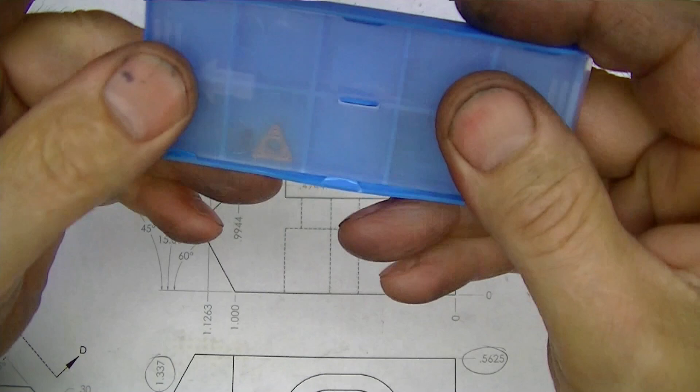Here's a job where I'm making some insert cartridges for a customer. These bolt into some other main part of the cutter body, and I'm doing three of each. This is one that's considered straight, and then there's this one that is a 45-degree angle, and they're using a screw-in style insert, so I'm using the sample insert and screw here. This is a 1/4 inch IC, inscribed circle, insert, and I'm making these out of A2.

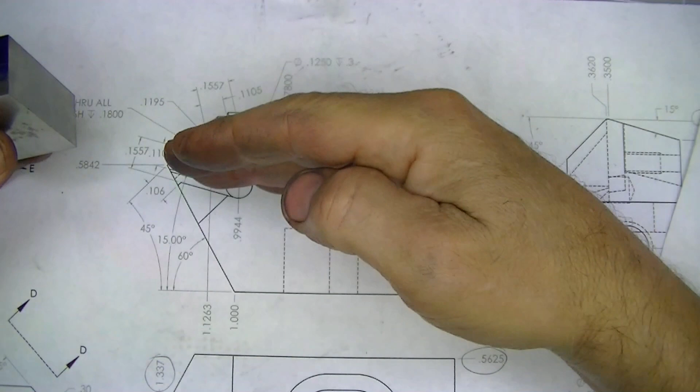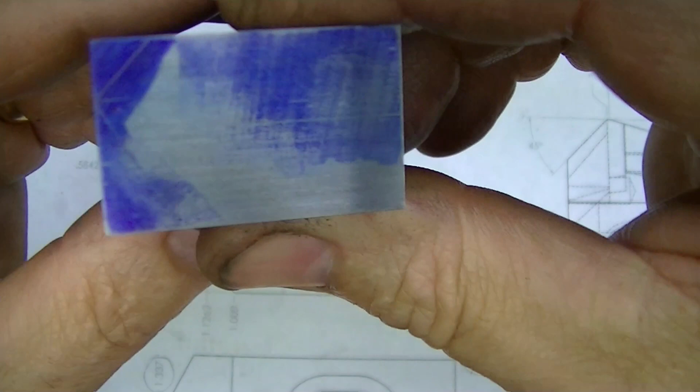And the procedure I'm using here is, since I'm doing three, I'm taking the major axis that has the most features on it, and making a block long enough in this direction to accommodate all the blocks plus saw cut plus allowance. So I'm doing the cross section of this on the end of this block. Same way on the other one. This is the block that matches this one. You can see I've got my scribe lines on here for where I'm going to saw this, and to match this cutout, and then the details on the end here, the actual angles.

One important note is that when you're doing this type of thing, you need to think through ahead sequence-wise. I could go over to the saw and say, okay, I'm going to saw this out, and then we'll saw these off. But now when I go to do my grind, I might want to be sitting this way to grind on this face. In this case, it wouldn't really matter, but it's always good to think ahead, and you might say, you know what, I need to leave this till the last operation because I need to sit on it or reference an edge on it.

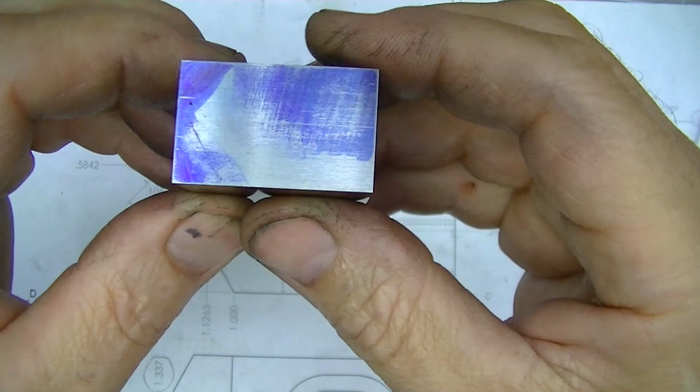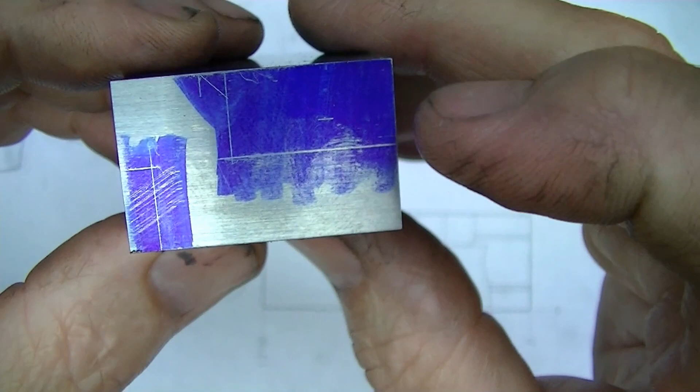So this is the block for that one. This is the block for this one, and you can see we've got our blue Sharpie on here. These are just lines for me to saw this out first, then I'll surface grind it. I'm going to saw both of these out, and I'll mill them, and then I'll come over on the surface grinder and clean the shape up both directions, and I'll even come in here and put this little 45-degree edge on there.

Anything that's on the cross section that you can put on full length, it means I'm not going to have to pick up individual parts and put them in and put a detail on one piece at a time. So that's what we're doing, and we'll go to the saw.

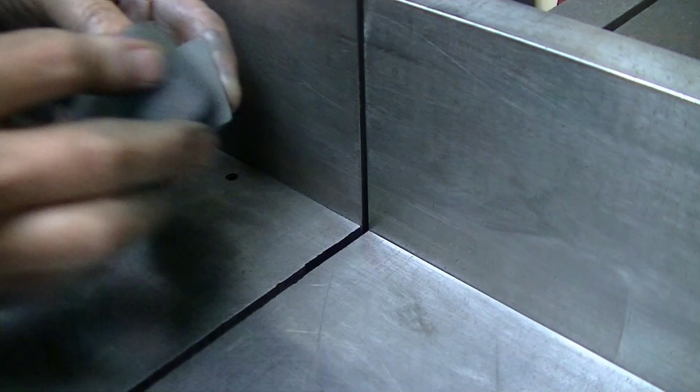I'm stoning the Rollin saw surfaces to get rid of any burrs or embedded chips or anything that's not a smooth surface here, because we're working with already surface ground parts. So we have to be careful that we don't, as we clamp these in the saw, if there's any burrs or anything, we'll end up putting a dent in the part from those chips. So very important to stone off the saw before you start.

Sawing out the extra material here on the Rollin saw, very handy to be able to clamp the part, have a straight line cut. You don't have to push in the parts. I'm not concerned about them moving or skidding. And controlled feed rate. I have a real nice, very aggressive Starrett blade on here.

Sawing the other corner out with the bandsaw. Just going by the layout lines. Coming across from the end. Getting rid of the major material. There's everything removed off the one piece.

There's the other one that needs the angled cuts on the end, 30 degree I'm showing there. And in this saw we can put this sideways and clamp end to end, so we don't have to try to do angled cuts having to come into the edge of the part. So pretty handy.

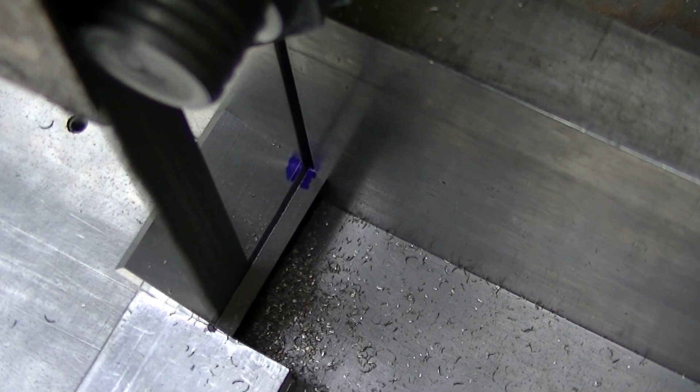Now I'll turn around and get on the other side using a 45 degree that we have to cut there. The other side, you're on the bottom. There's my line that you're seeing that we're going to use to visually align with. Got my 45 gauge on the left hand side there that I'm holding the angle.

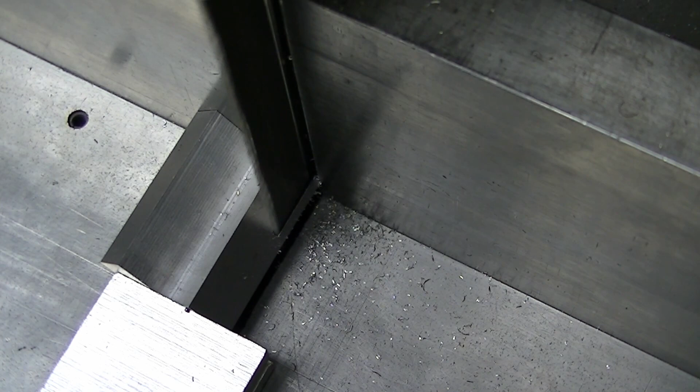And then I'm clamping with my chin on the cam lock on the saw to get that angle. And then sawing off the 45. Again, here you can see how sawing angles is real easy with the clamping arrangement there. So still quite a bit of material in there, but we're going to blast that off with a grinder.

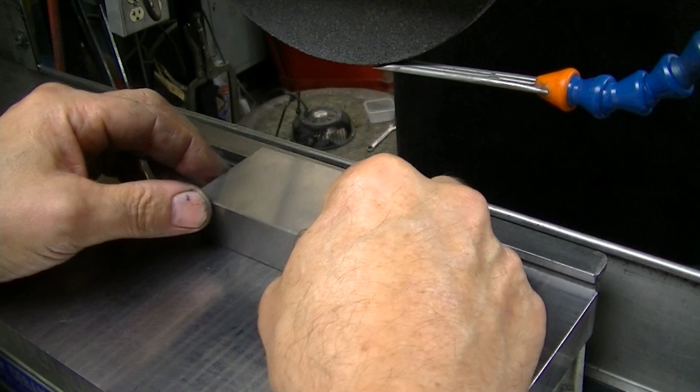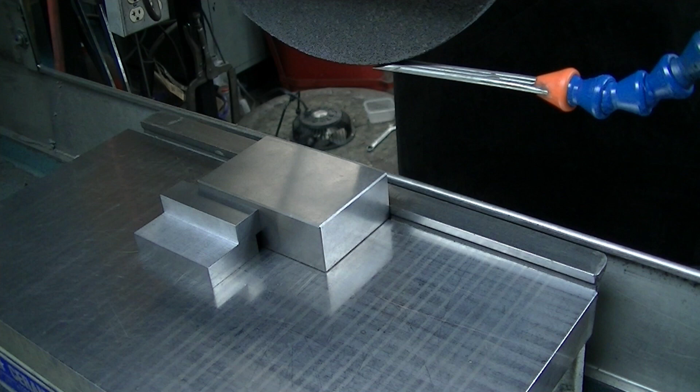The hydrodynamic action works on well-stoned blocks and chuck also, not just the surface plate. So here I'm getting ready to stage the two pieces that have the same step height and depth from the front edge. And you see I placed the one in there on its nose. And the other one goes in, same location, making sure everything's clean, always wiping everything off chuck and part.

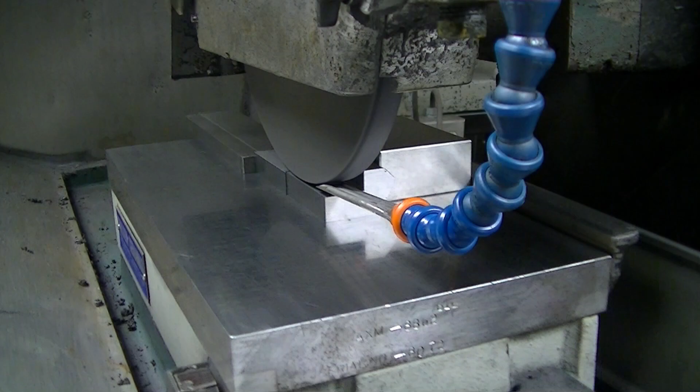Be adding blocking to the back here so that these parts can't skid endwise, and forcing the pieces in with my fingers snug while I tighten the chuck down. Here we're coming in with the wheel, just getting ready to touch off, and just touch off on the part to get our initial starting position.

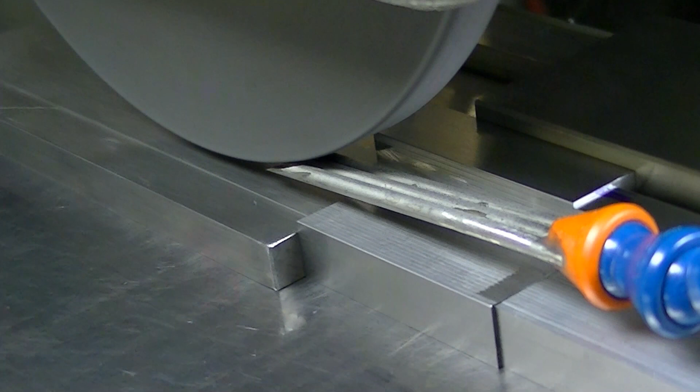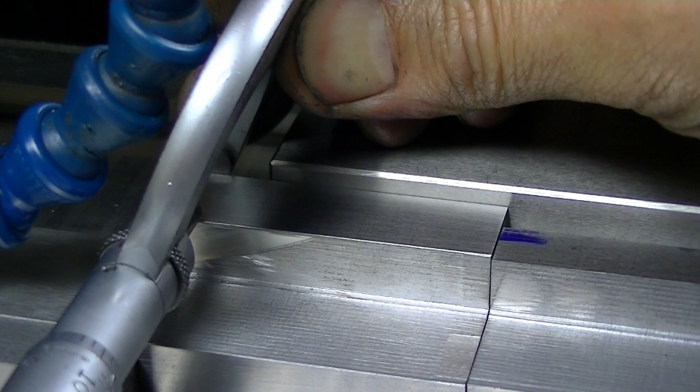And then here we will just touch off on the edge of the wheel, on the back side of the wheel there I'm touching off to establish where I am, and just taking a plunge cut there, creep feed, where I go in and take a cut. Take another little deeper cut, and then we're going to move out and check with the micrometer, see where we are, and set our dials accordingly.

Now I've moved over the full amount, which is almost 30 thousandths, and taking that full cut very slowly with the full face of the wheel. And I don't have the coolant in the ideal position here in this particular cut. Later on you'll see one where I move the coolant up in a better position. But here's where we're just removing our material, fast forwarded there toward where we're coming out the end.

You will see a little burn at the top because of poor coolant placement, but these parts at the moment are soft, so it doesn't cause any real issue. But this is a quick way to remove a lot off facially instead of just pecking away at it with the side of the wheel. You're using the face, the actual outside diameter of the wheel to do the cutting, where it's a better conformity ratio of grind. And here we're just taking a spring cut.

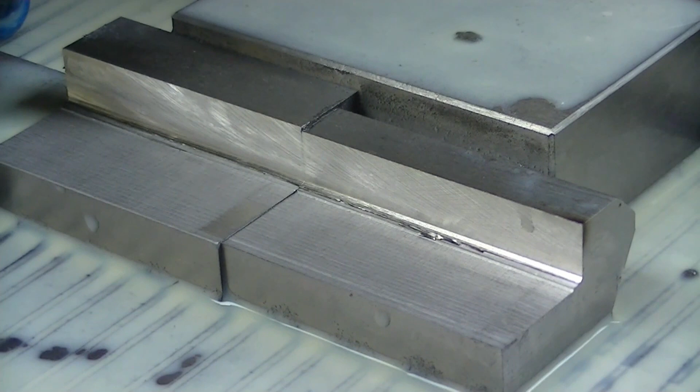We went in until we actually caught the surface again, and it's sparking out. There's the finished surface, and we'll check again with the mic, make sure we're where we need to be.

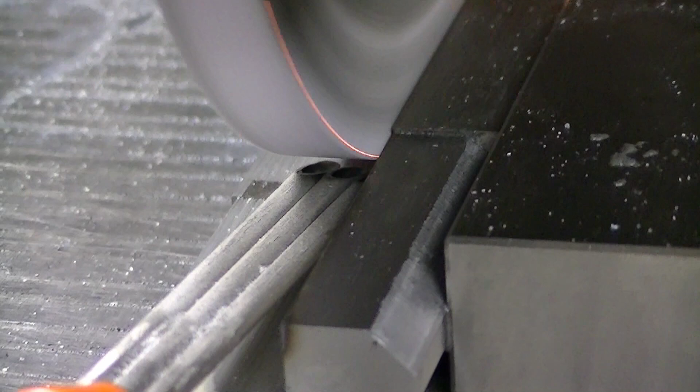Here I'm using a razor blade just to cut into the corner of the wheel and see what kind of radius I've got on the wheel, and I dressed it back until I was happy with the radius that I had left on the wheel. Now I pick up with that freshly dressed corner to get back touching that finished face, getting ready to actually start to plunge down in depth now to take this thing to the vertical thickness.

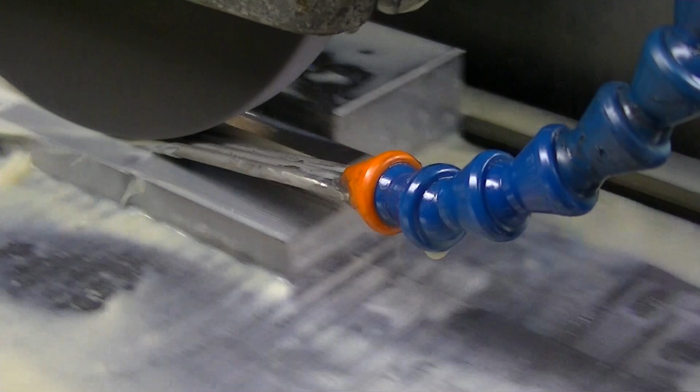We're going to be just reciprocating, down feeding a few tenths per pass, reciprocating quickly, and plunging down till we get a clean up where we can do a measurement. So we've gone down till we've cleaned up completely, and you can see there where I've got basically full wheel contact cleaned up there. Now we're just going to move over full wheel width. We've raised the wheel up, and now we're going to come back down to the same setting as we did on the back pass, basically just to remove the material quickly.

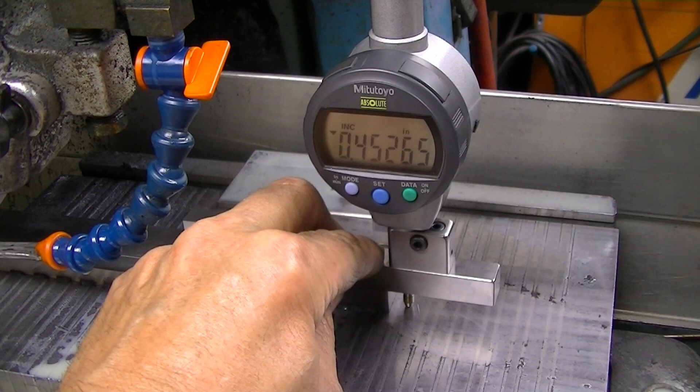So that's how you can not have a lot of wheel breakdown, by just straight plunging a few tenths at a time. Here we're going to check where we are, see what our measurement is, and then we are going to correspondingly go back and replunge those surfaces, taking off the amount we need to get down to thickness. So it all happens really quick, faster than going over to the milling machine and trying to mill and then come back and forth between the two parts.

So plunging again, moved over, plunged again. Obviously it took a little longer than this. This is sped up and cut down in time, but now we've got our full width. Now we'll measure again, cleaning off where the depth gauge is going to hit. We're shooting for 4375. We're within a tenth, which is plenty close enough for what we're doing here.

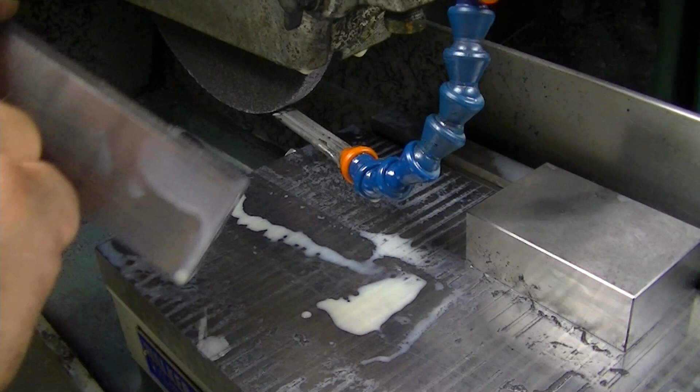Here I'm using a piece of carbon rod to pry the parts up, break the stiction loose. There's the grind finish and the face grind. You never want to slide parts on the chuck if you have a choice. So I'm using that stick, pretty handy, to just pop parts up and get the vacuum, the suction there to break loose on the pieces. And then same way with the 1, 2, 3 block, put a clamp on there, get the pry bar under the edge of the clamp, pop it loose, get that broke loose. Just a good way to get things off the chuck.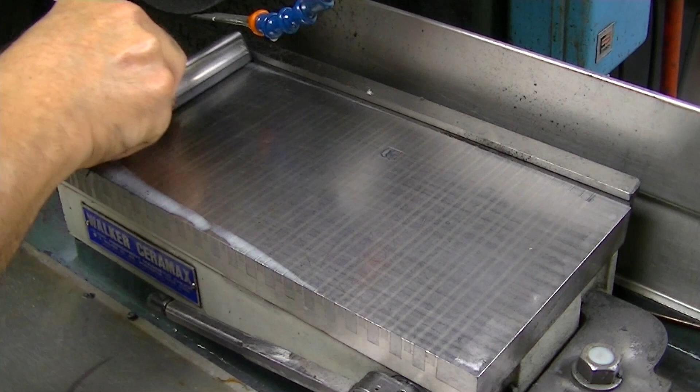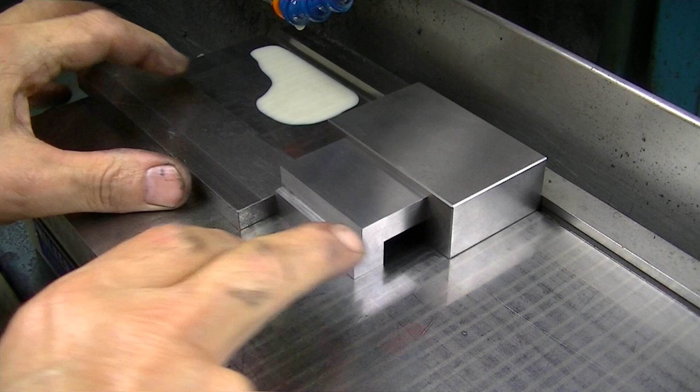A squeegee is also something that you might not think of, but works really well on cleaning the chuck off. Depending on your coolant, you might want to put a piece of Viton sheet stock in there for the squeegee, because it'll break down otherwise. Doing the other step on this side of the part, the opposite side, everything's been stoned and cleaned. We're pushing up, we're using our back block so the part can't skid down the chuck. Holding everything in place, putting a little finger pressure on there as I tighten the vise.

And same procedure here. We come in, touch off, see where we are, take a creep feed cut through this edge to establish it. Now you see I have the coolant in a much better location up at the top of the cut, so the coolant's carried down through. That last coolant placement was not good. It worked, but you'll see here, this is much better. There won't be any burn at all on the edge of this part when we come back.

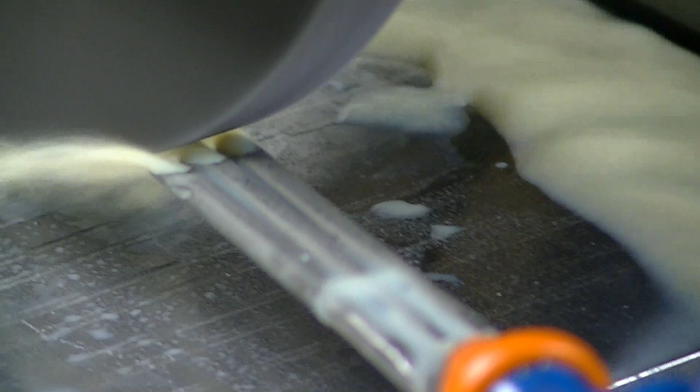The wheel will wear some as it goes through. It's always important to make sure that you've got an actual cut full length. Here I'm using the end of the calipers to measure the step height here. Obviously I checked and deburred the edge there on this outside, and then make our adjustment, creep feed through again, the full amount that it needs to be removed. Cable drive is fairly important on this.

If you've got a really sloppy gear drive on your grinder, you might have issues with creep feeding through like this, because it is basically climb cutting.

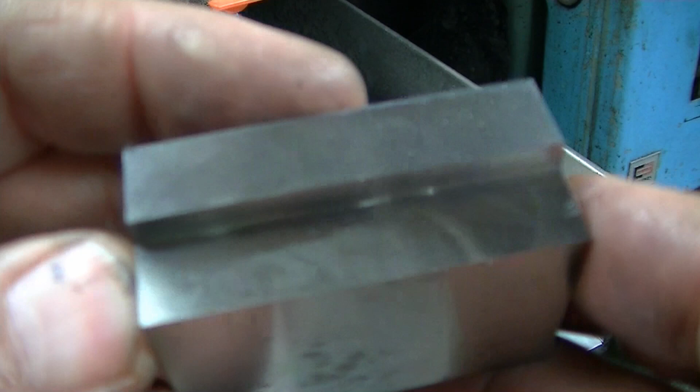Checking my height there, again using pieces to pop your parts off, break the suction. You don't want scratches on your part or your chuck from dragging the part off over grinding grit on the chuck.

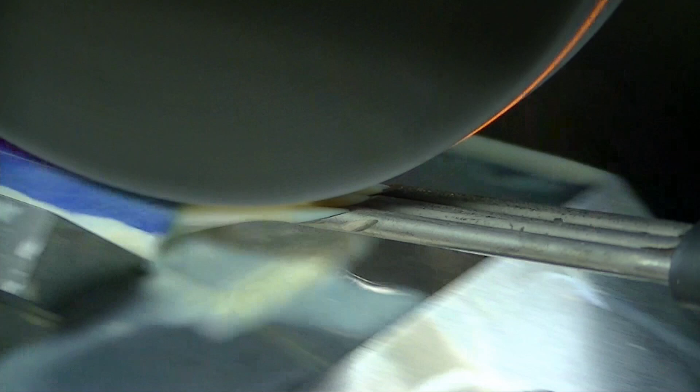Here we're using an angle head from a square head, 45 degrees, to set the part in to do this little 45 chamfer. We're removing all of the material with the grinding wheel. We'll come down and touch, see where we are, get the coolant on, and this is purely visual, going to the scribe marks. Most of these dimensions here aren't real critical. We're just using the grinder as a metal removing machine, as a convenient way to do it.

Here I'll just grind down to the scribe mark. This is a bit sped up grinding down until I see my mark. Then a little traverse grind side to side just to smooth up the surface. You'll also tend to wear a slight groove in the wheel. There's the chamfer ground on.

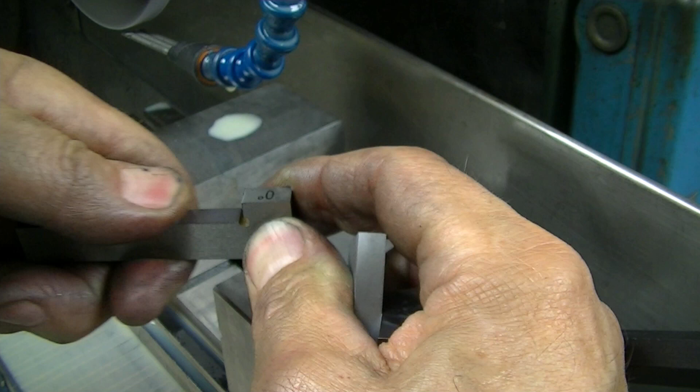Now we've got another angle to do. We're using the angle blocks. That one's just a riser block that comes in the Brown & Sharpe angle block kit.

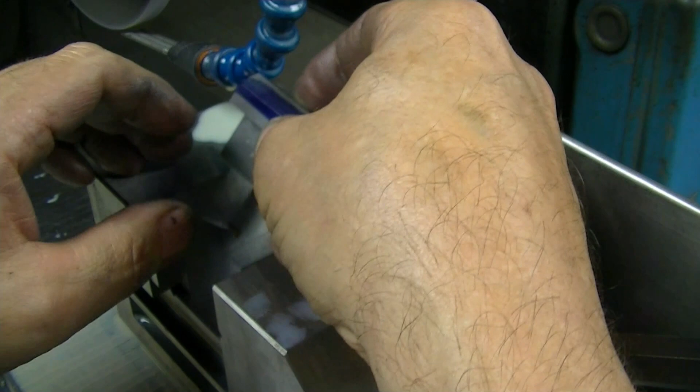And I believe this is 45 degrees that we're going to do this other side on. Couldn't fit it the other way. The square head from the combination square wouldn't work for this, for the first side, so that's why I'm switching over to the angle blocks on this.

See me pumping the clamp there to make sure I'm sitting square, making sure the part settles and isn't squirming, so I know everything's sitting properly. Once it feels real good, then I just snug it up and we'll grind from there.

It's a fair amount of material to remove off of this, if you remember from the saw pictures. But same procedure here: we're just plunging down two-thirds per pass, both directions, each end feeding down, with decent coolant. I don't have coolant blast in there, but enough to just keep the part cool.

I'll go down visually until I can see getting close to the marks. You notice there's a fuzzy hair kind of burr that forms on the edge of that. Using the Hastings triplet there to take a look at the edge to see where I am, and grinding accordingly.

You can get pretty precise with that, actually. Doing a little traverse cut across there now, just to see where things are. Take another look with the Hastings triplet, and grind a little more based on what I see there.

Now we'll take a little closer look. We're seeing the ground surface and the blue surface and the scribe line. As you can see, we're looking right through the Hastings triplet with the camera, which actually gives a pretty good view.

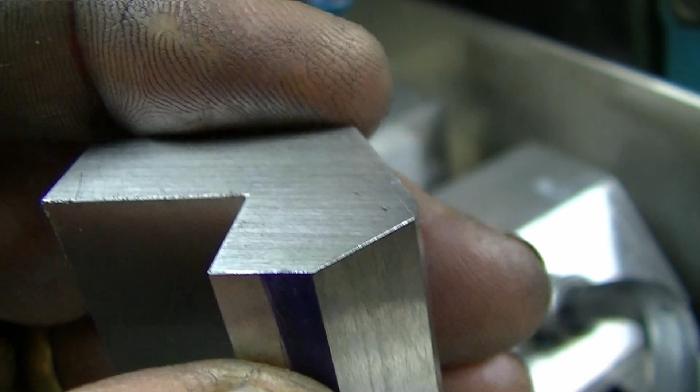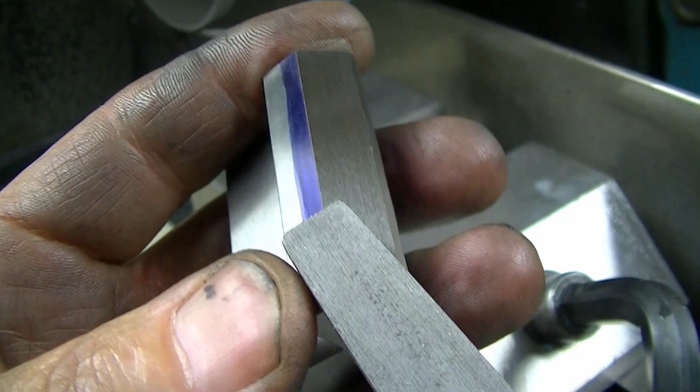It's important to get rid of the burrs that form on each surface that you do, so that they don't interfere with your clamping in the subsequent steps. I'm using a file here, but you can stone them, whatever.

Here we're doing a 30-degree bevel, and I just have two parallels in there to hold me at approximately the height I'd like to get the surface above the top of the chuck, using a Starrett angle gauge out of an angle gauge kit. Basically it's a pack that has them all in there.

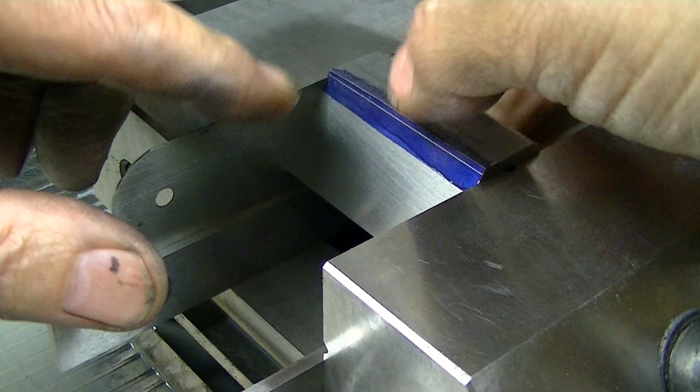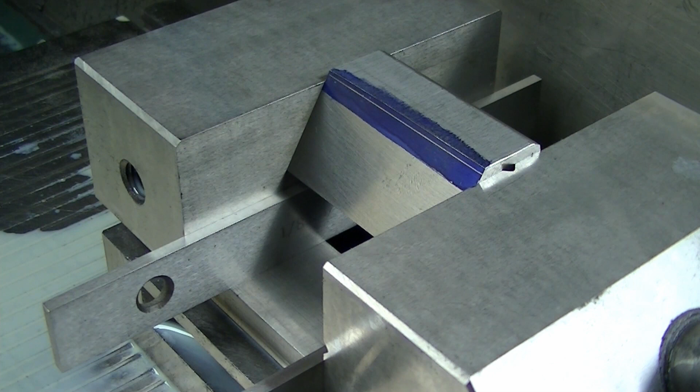I remove them so they're individually accessible; in the pack, they're kind of hard to use. So here we're gently snugging up the vise, and then we double check to make sure our gauge is fitting well, and remove the parallels and anything that's loose, because it's that much less to clean up with the coolant.

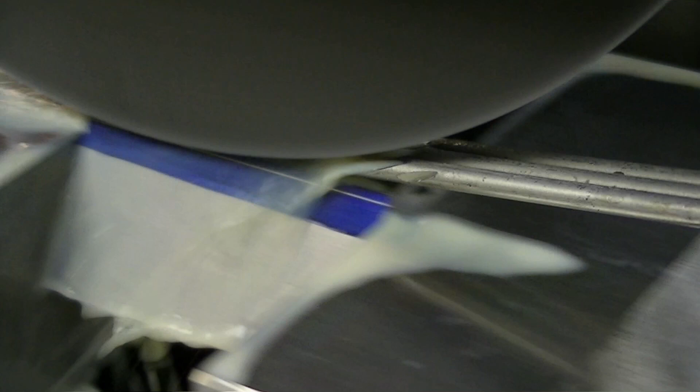So here we'll touch off on the top, and start to grind on that. Same procedure—we'll just down feed into this until we get to our scribe, checking our scribe line there with the Hastings triplet to see whether we're in place.

This was wider than the wheel, so I have to move over. I've raised the wheel up, and now I'm going to come down to the same zero and just plunge down on that to remove that material quickly.

Once we get down to the bottom there, we will traverse, as you see, just to smooth things across, blow things off, and remove the part. And there's our nice 30-degree bevel, and we'll deburr that and carry on.

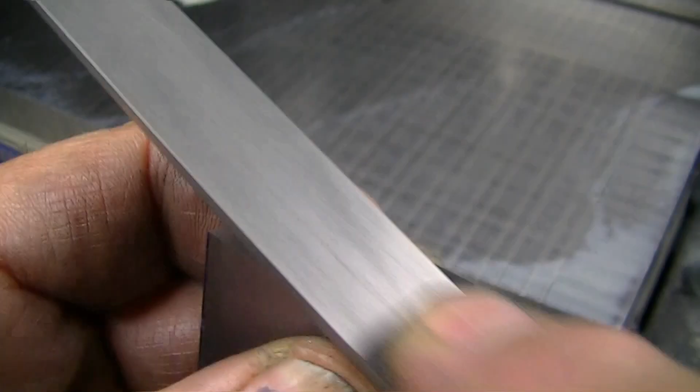Deburring this piece on all the edges, on both sides. It's a number 4 cut pillar file. Really like the pillar files with the safe edge on both sides.

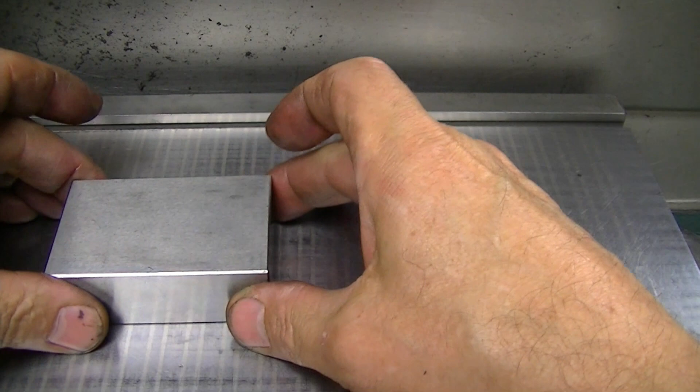Stoning the chuck with the precision ground flat stones. Stoning the 1-2-3 block surface. Wiping the chuck. It's always raining grit and dust in the shop. If you're grinding, you've got stuff raining down on your chuck. That's why we're wiping constantly. You can never wipe enough.

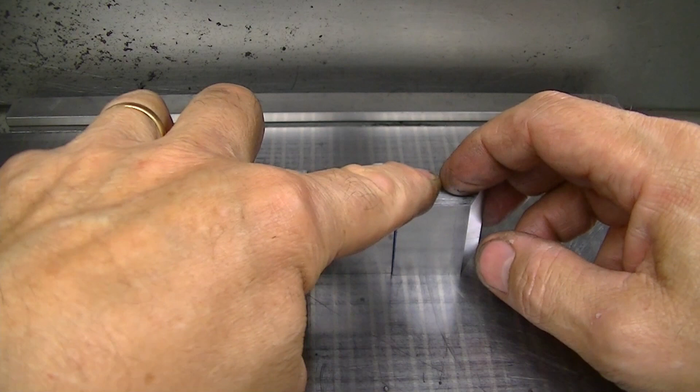The 1-2-3 block is blocking these parts so that they can't tip over endways or skid down the chuck. I'm letting one piece block the other, holding them firmly as I tighten the chuck so they're slid tight back against each other and against the 1-2-3 block. Checking their tightness on the chuck, making sure they're firm.

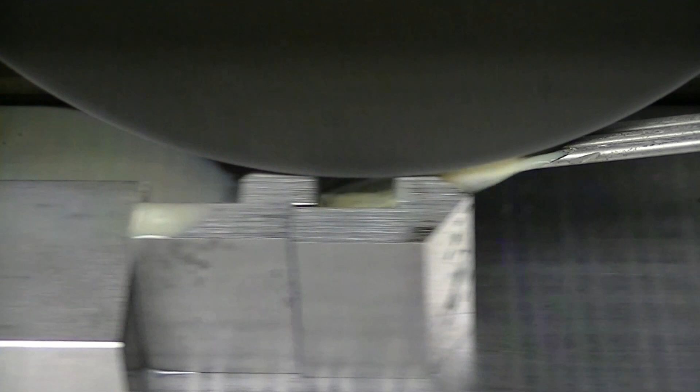Here we'll touch off on the top, and all we're doing here is cleaning up so that we are maintaining the squareness on this end that is already established on the other end that's actually on the chuck. So that's why we only sawed one off and grind these immediately, so that we maintain the squareness of the pieces.

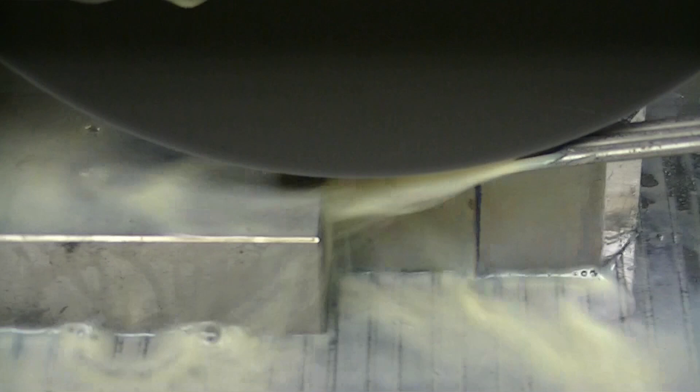Here we don't have a lot to take off, so I'm taking maybe 3/1000ths off and doing a normal traverse type grind across. Taking a finish pass across here just to improve the finish a little bit. I'm not measuring because this isn't critical, it's just going to get sawed.

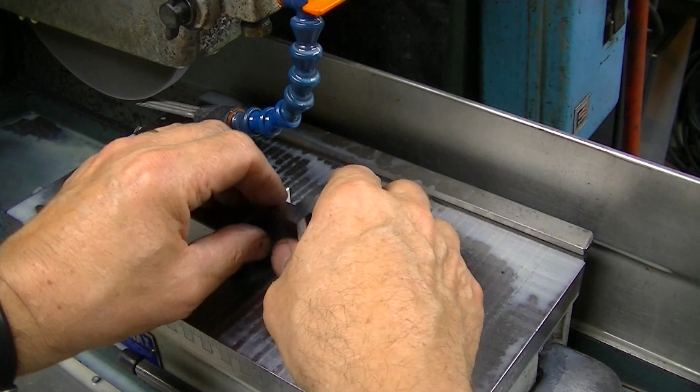Here I'm taking the pieces off the chuck. I'm pressing down hard as I bend them over to break them loose. Don't lift and bend, press down hard and bend.

I've already cut one piece off at the correct length, and then this is the last piece that I'm just trimming the excess off. But I have not lost my ground surface off of each end. So all of these are now sawed to the same length, and I'll be able to put the ground face down on the chuck.

Tapping these down gently. Even when you're very, very careful, sometimes you can get just minute particles, and you can sit on one and it'll keep you from actually getting down tight to the chuck.

Here we're doing plunging, a few tenths at a time at each end of the stroke, full wheel width, moving over back to the same, down to the same zero in each position, moving over the last stripe, down, plunging. Just getting all the material off to establish a datum.

Cleaning off to get my depth gauge on there, 564.3. I'm headed for 562, 9/16. It's not critical. If I'm within a couple thousandths, it's good, but it's easy to hit closer than that with the grinder. 562.7 is within 2/10ths, which it doesn't matter.

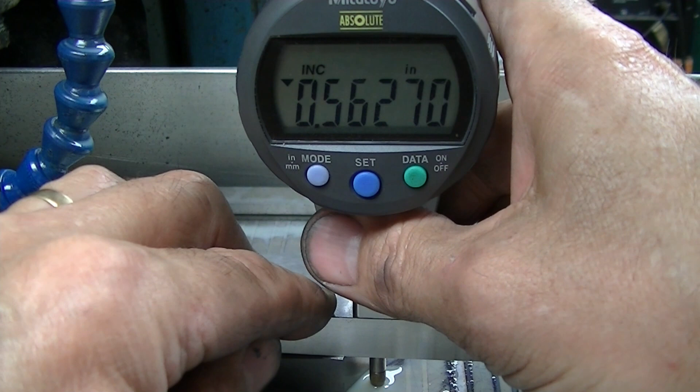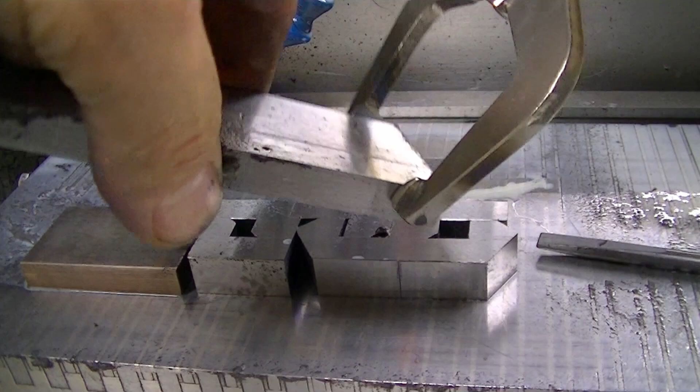Taking parts off, using the clamp and the carbon fiber rod to break things loose. Same thing here, putting a clamp on, sucking that piece off now, pressing down hard, and using the Knipex parallel pliers there to just do a little twist. Press down hard, twist. If you lift, you have a tendency to rebound and actually smack the chucks.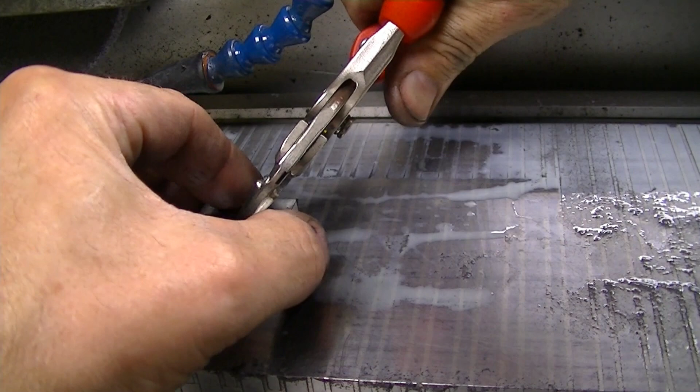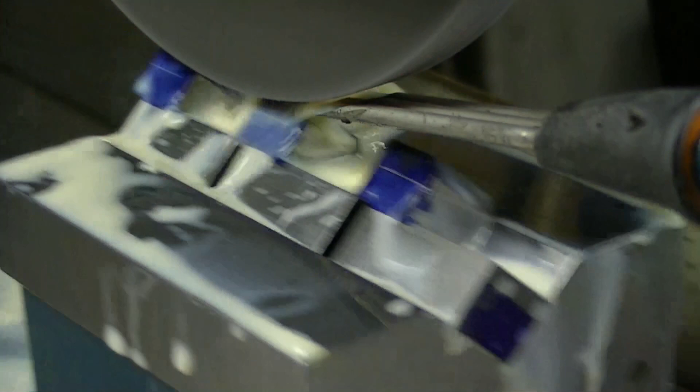I'm not gripping hard with the pliers, I'm just getting enough there to be able to twist the parts and pop them up. So like I said, secret there is press down hard and then just rock up on the edge. Here we have the three pieces in the magnetic V block, and blasting that material off.

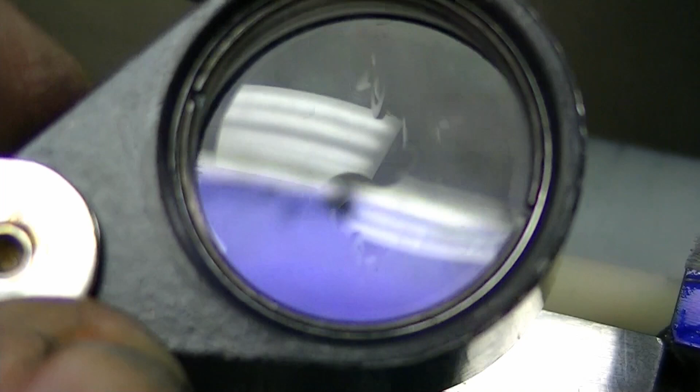Now we're checking to see where we are with the Hastings triplet, to take a look at where we are and determining how much we need to take off.

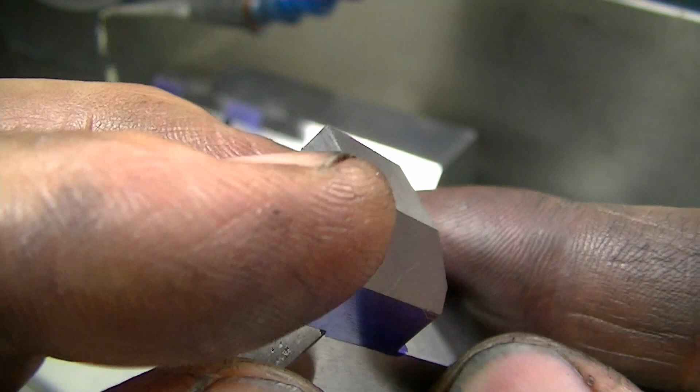After they're done, removing it from the magnetic V block, turning it off. As always, looking for some means to, if possible, take things off without sliding. Everything will last longer in your grinding environment if you don't slide things off.

These are the other ones. Did the same operation to these. Notice the end of these is different—it's the one with the 30 and the 45. Same 45-degree relief on it.

I have a 15-degree bevel that needs to go on this surface here. The magnetic V-block is a really nice way to hold these pieces, especially since I have 3 and they all just happen to fit in the length of this. So I'm going to use that to my advantage, and I'm going to tilt this angle block 30 degrees, and since it's 45 the way that it was sitting in there, that'll give me my 15 that's left.

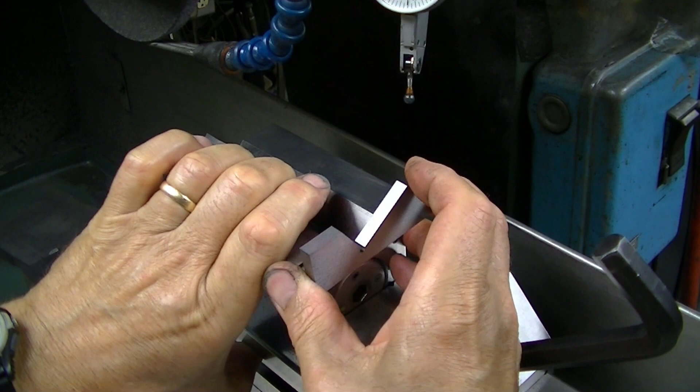Now normally I'd love to just sit this underneath this and let the magnetic V-block sit on that and clamp it, but as you can see, the aspect of this is just not conducive to it sitting on there because this won't fit on the vise or the other way. So not really a problem, we're just going to regroup here.

I'm temporarily going to see, I'm going this direction. I'm going to temporarily just hold this angle gauge here. Get my Allen wrench for the magnetic V-block, and I'm just going to turn this on gently enough to hold this.

Get this flushed up here. Now this is also holding itself. The magnetic V-block is holding itself to the vise now, magnetically. So I can now take this and indicate this in using this. I don't have to be actually getting this where I'm engaged.

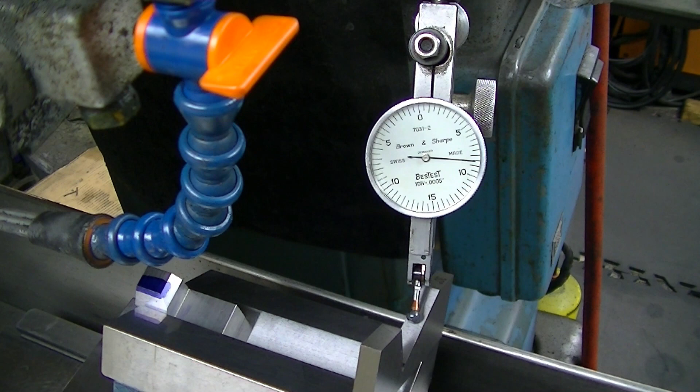Get the indicator lined up here. Make sure I've got room to travel. Yes, and now we can just traverse, come down on this, get engaged, and traverse on this, and just adjust this until we get this lined up nicely. Still a little high. Yeah, we're getting in the ballpark. There we go.

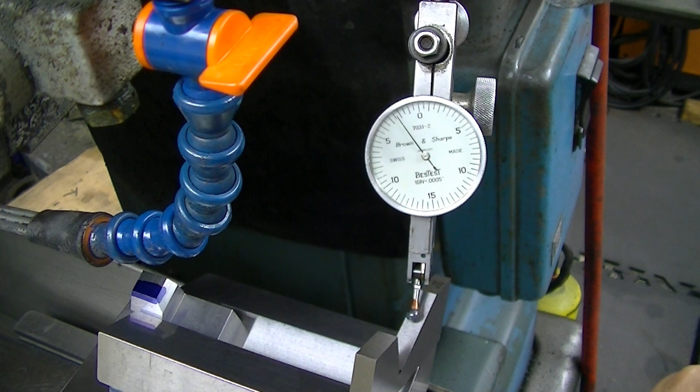So now we need to go the other way, just a trifle here. That's more than adequate for what we're doing here. It's just a clearance flat on the bottom of the tool, but of course, we can't let it go being off a few tenths.

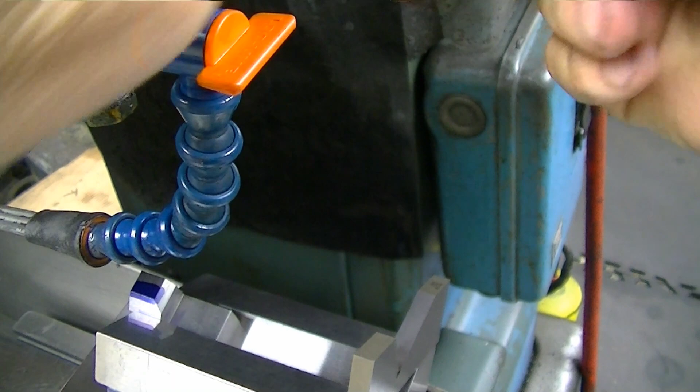So now get the indicator out of the way. Come back here to see the whole setup. Now we can see that we've grabbed the V-block with the vise, so it's not relying on magnetism anymore. And now I can just slide this off because I just had it gripped lightly, and we can stack our pieces in and grind our 15-degree angle on there.

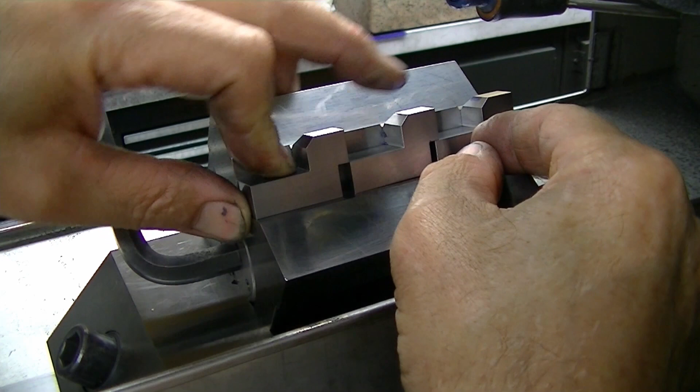Loading in the pieces, just making sure they're sliding in smooth. Slide down here. You gotta be careful that they don't jump on each other like they just did there. This one's got to move down to the end. There.

Okay, magnet on, we're ready to grind. That's my medium rear cover that I have back here, and not quite tall enough for this, so I'll put my tallest cover in. It latches in the back here with a grip and a hole location, so I can slide up and down to get any height that I needed there on the back.

Now we're grinding that 15-degree bevel, just plunging down on it and removing all that material, and finally taking a traverse pass after we get down to the line. Releasing it from the magnet.

Now grinding the same 15-degree bevel on the other set of 3, the one with the 45 and 30-degree angles. Exact same procedure, just going down and going down to the layout line.

I need a 10-degree bevel on this portion right here on these pieces. Still like to use the magnetic V-block because it's a convenient way to hold these. So in this case, I'm using the large V on this side, small V's on the bottom, and it actually leaves enough room that I can use the angle block and actually just set it in there on the angle block to set the angle here. So I've got a 35-degree block there, subtracting from my 45, giving me the 10 degrees that's left there.

So I'm stoning these pieces off screen, sliding them in place. And one of the things that's important here is you always have to think about the actual motion that the part will take from the forces of the grinding wheel.

The grinding wheel is rotating in this direction, pulling this surface, so you have to think about what can happen. We have very little gripping surface down here at the bottom. This part is not stable by itself. It can cock like that, and in this case it's somewhat rolling out of contact with the wheel, but not completely. This is basically a crash waiting to happen.

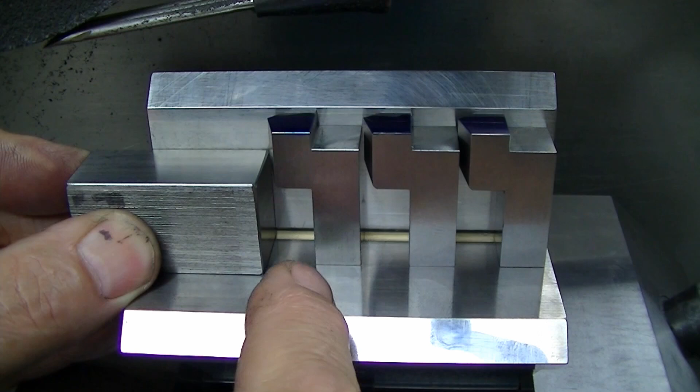So you have to do things to prevent that. That's what blocking is for. Have a nice block here that's got ground surfaces everywhere. I'm backing up, getting all these parts in place, positioning them so I've got a decent bearing area where the parts are grabbing, plus a good substantial grip. Now I slide them, making sure my parts stay put, sliding up very carefully against each other, making sure I'm seated on the bottom.

Now the forces here are absorbed by this block, and this part can't just tip over as I grind. So blocking is very important. You have to think about the forces the grinding wheel puts on the part and what will happen if the part moves. If you have big surfaces and a large stance on the part, that's all out the window, but as soon as you get little teeny parts with less area being gripped magnetically, it's very important. Now that I've got them all in place, touching each other with no room for motion, I turn my magnet on.

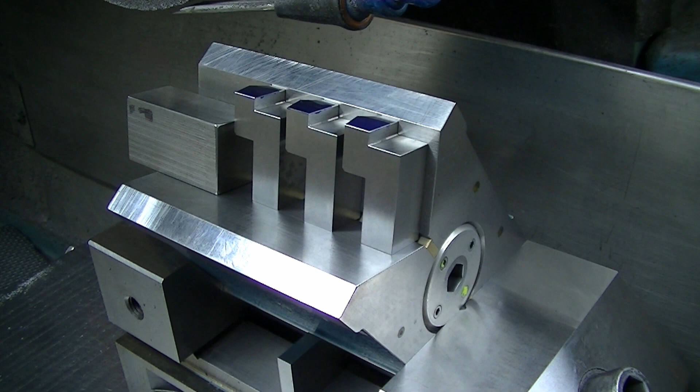Always check, always push on your parts in the direction the wheel is going to push, and make sure they're stable. If you forget to turn the chuck on, which can happen, you'll catch it that way. So it's always good to turn the chuck on, and always before you grind, push your parts.

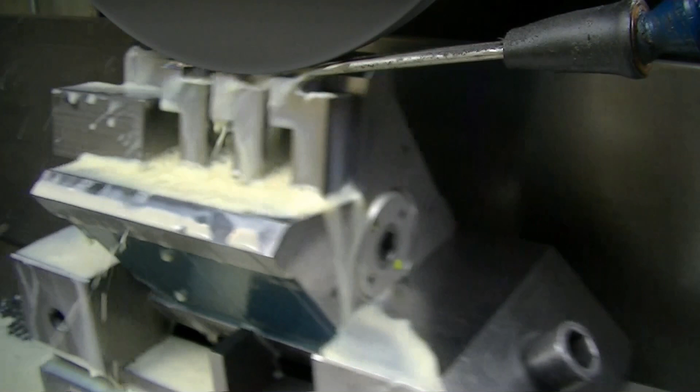Plunge grinding down on the face there, going to the layout line as before. A little traverse, and that's the end of those parts. There's the flat, and here's the 10 degree I just did.

Now we need a 45 degree on here, removing this corner on all the pieces. I could take the vise off and set this down since we're doing a 45, but since the vise is in there, it's easy to clean off. I just set two half-inch parallels here to set the magnetic V-block on, basically to give me room so my wrench still clears. That's why I can't set it down all the way in the vise.

Now here's a case where the blocking is really critical. Remember we said think about which way the part is going to go when it gets pushed by the wheel. So forces in this direction, the wheel drag going this way. Look what happens when this part comes in here - it rocks up into the wheel. This is your classic horrendous wheel crash, where the part actually gets a bite and self-feeds into the wheel. It can take a chunk out of a grinding wheel in a big hurry and cause a heck of a crash.

So it's very important to be aware of that. Always think about how the part's getting pushed. This side is real important, more important than the last side - it's really important to be blocked properly so these parts are hopefully prevented from doing that. When I say hopefully, you have to remember that this block, if it skids, can let these parts do what we just saw. But because of its larger mass, more lines of flux are going through it from the magnet, so it's got a better grip than the parts. This shouldn't be a problem.